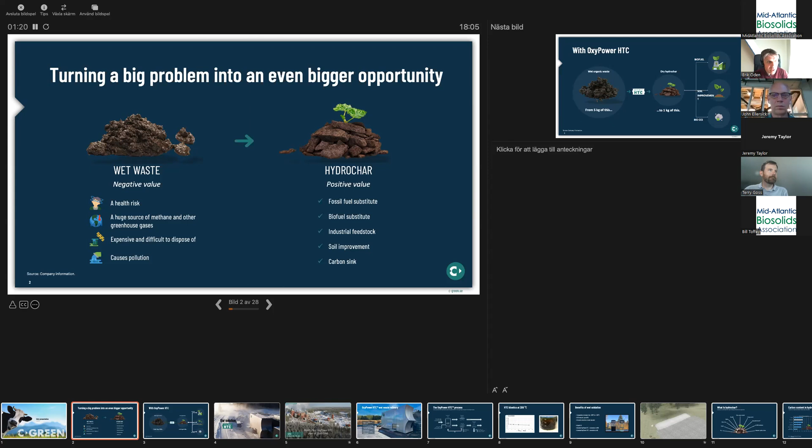What we've done is taken proven technology from the forest industry that's been used for hundreds of years and turned it into a solution that we call OxyPower HTC that turns the wet waste streams into a dry hydrochar. So what we in our process can do is reduce the volume. For every 5 tons of waste, we turn it into 1 ton, or 20% of the original volume, of hydrochar. That can be used for several different useful applications. I'm going to show you the first one here very soon.

So this is our first full-scale plant. When we started in 2014, we developed the technology at the Royal Institute of Technology at the lab we had there, and did hundreds of trials for different kinds of sludges, and showed that this works on all kinds of biosolids, digested, undigested, and all kinds of different wet waste streams. We built a pilot plant with a capacity of 1 ton a day.

And then we found out that Stora Enso were interested to help us build a full-scale plant. And this is the world's first OxyPower HTC plant that converts about 20,000 tons of wet biosludge into hydrochar. And here's a small film showing it in operation.

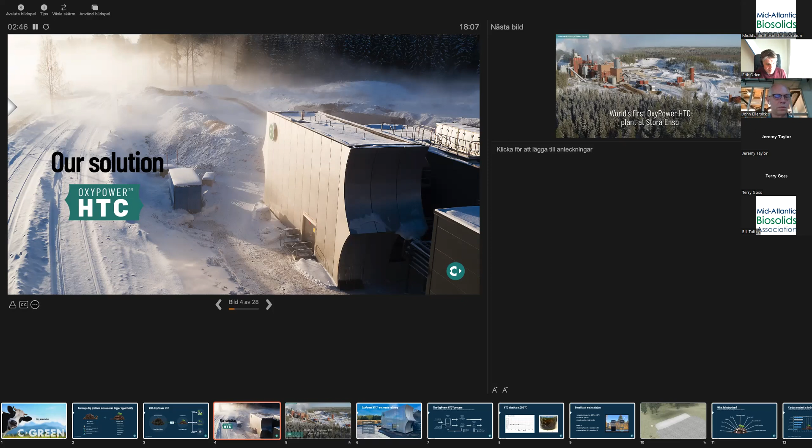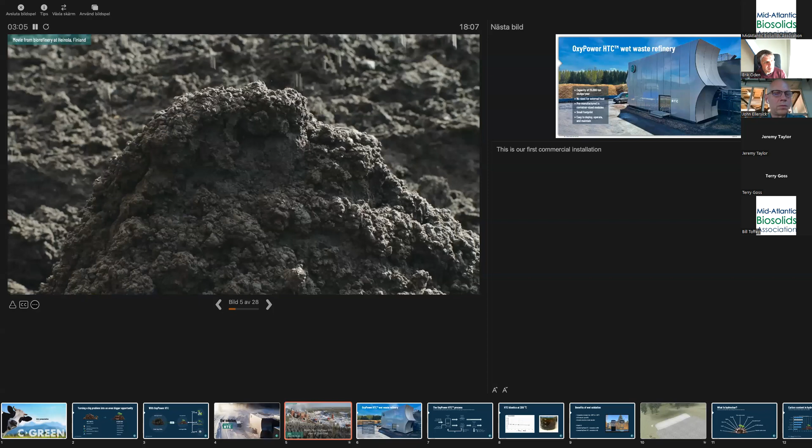I'm here at Stora Enso's mill in Heinola, Finland. C-Green worked together with Stora Enso to build the world's first OxyPower HTC plant using our unique technology to convert wet sludge into solid biofuel. The plant is now operational, and each year it will turn 18,000 tons of sludge into biofuel.

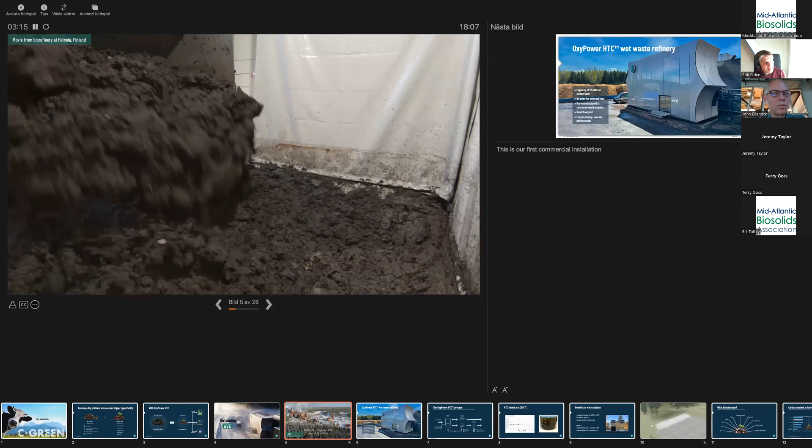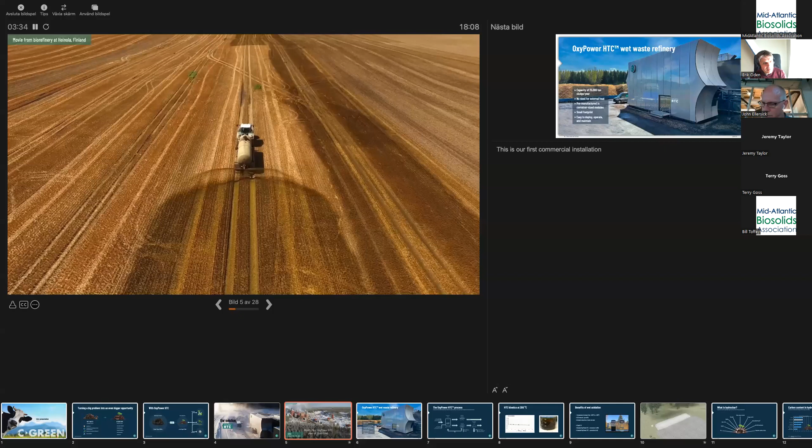The impact of sludge handling is not so well known, but it is a major climate and environmental problem. Sludge from the treatment of wastewater from industries, households, and food production causes greenhouse gas emissions, can spread dangerous substances in the environment, and can pose health risks. With our new technology, we can lift sludge handling into the modern circular bioeconomy and harvest useful resources from what have been, until now, seen as waste. In this plant, the sludge is turned into a carbonized biofuel using oxygen from the air to power the process.

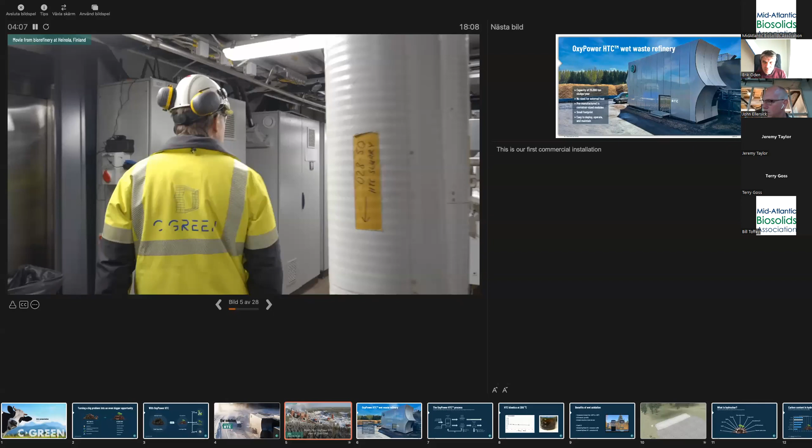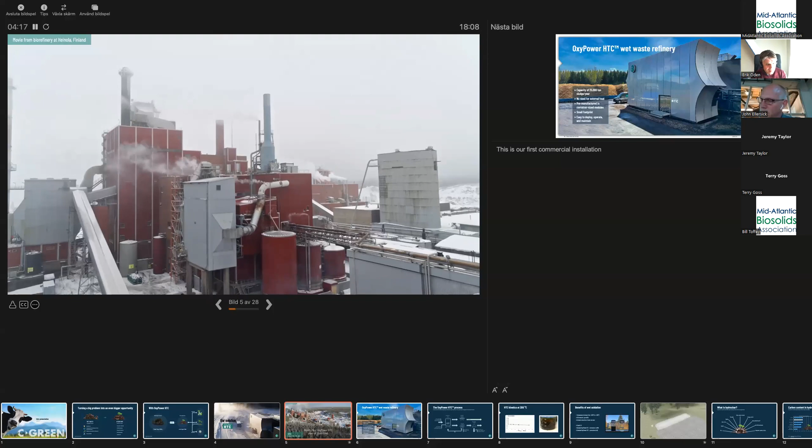Here at Stora Enso's mill, the biofuel is incinerated in the boiler, which means they need less external fuel. The boiler produces energy for the mill and for heating the town of Heinola. The biofuel is safer and easier to handle than sludge, with a volume of less than 20% of the sludge.

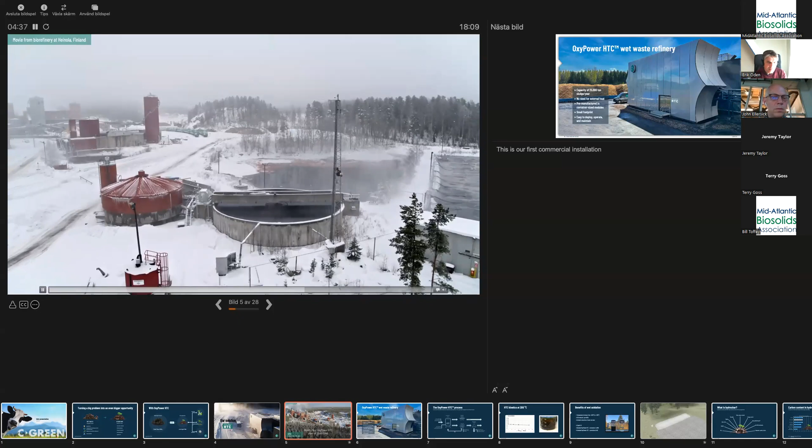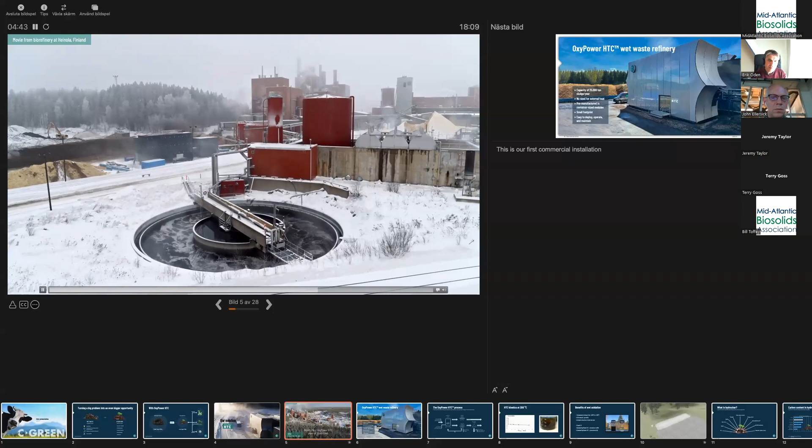Here in Heinola, the water removed from the sludge is used to increase the mill's biogas production and to help reduce the need of chemicals for the biological water treatment. C-Green's sludge handling technology effectively stops greenhouse gas emissions from sludge storage. The biofuel produced can replace fossil fuels. In future plants, it will be possible to separate nitrogen from the process and replace fossil fuel-based fertilizers.

This first commercial OxyPower HTC plant is just the beginning. Here, sludge is no longer a waste problem and a climate threat, but the source of useful bio-based products. This is the solution to the global sludge challenge.

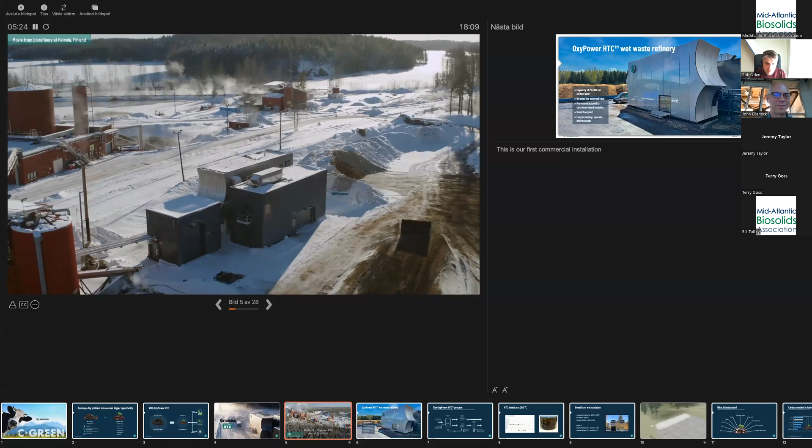Right. So our approach when it comes to designing plants is both to try to make them beautiful and also to make one that is, like the Model T, one size fits all. So we've created a plant design with a capacity of 25,000 tons of wet sludge per year, with the capacity to handle 5,000 tons of dry solids.

The technology as such, I will come into how it works a little bit. It doesn't require any external heat. And it's built up from prefabricated modules. I will also show how they are built up together. And all in all, it is a very small footprint of a refinery that can handle all this sludge and turn it into something useful.

So typically, you can handle all the wet waste from a city of 200,000 to 300,000 people. And it's fully automated. The plant in Finland will run from Stockholm without any problem, without anybody there for the actual operations.

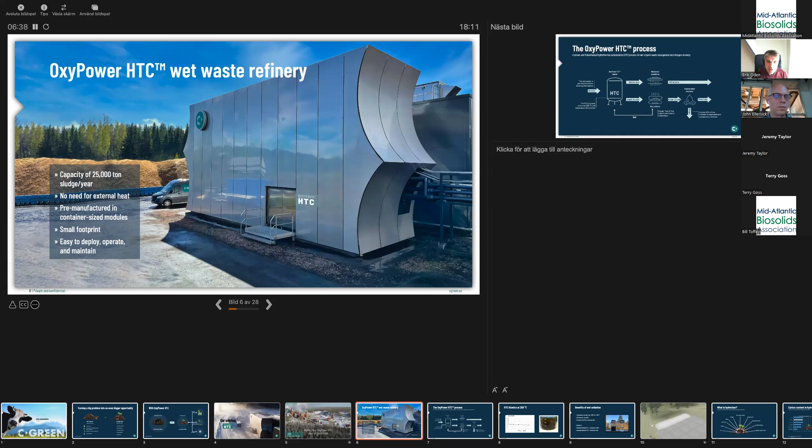So the basic principle is that we feed in the biosolids into the process and heat it up, and it comes into the HTC reactor. I will go through it a little bit more in the film, more animated. In the reactor, we get two streams out, a slurry rich stream that we dewater and it turns into the hydrochar, and a stream that doesn't have virtually any particles, and that we oxidize with oxygen from the air to create the heat we need to power the process.

Most of the nitrogen will end up in the water, and we have the possibility to extract that in the form of ammonia as well. A nice effect of wet oxidation is that the nitrogen that comes in many forms is turned into ammonia, which is quite handy.

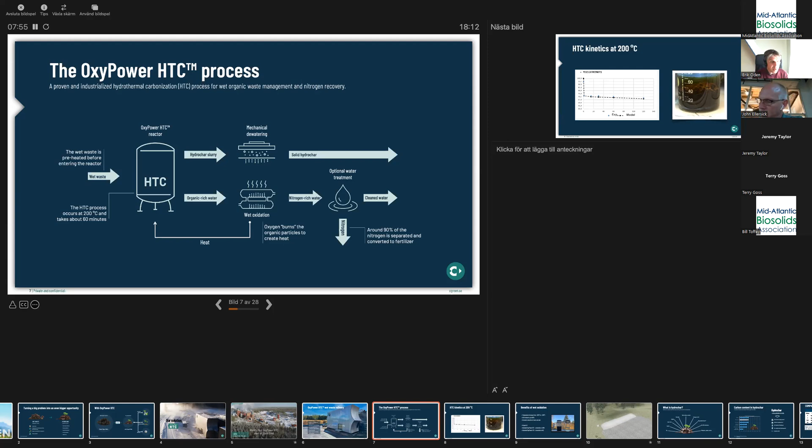So what happens when you heat up the waste? Very, very quickly, at around 200 degrees, it turns into these carbonized particles that are hydrophobic. So the actual carbonization goes very, very quick. But the particles are very small, and to be able to dewater them effectively, we need to have a retention time. Typically, we use about 1 hour to have an efficient dewatering.

And what's quite interesting and fascinating, if you worked a lot with biosolids, that are very, very difficult to dewater, is that the particle-rich stream separates very, very easily and nicely if you take it out from the reactor, and you can see that in the film here.

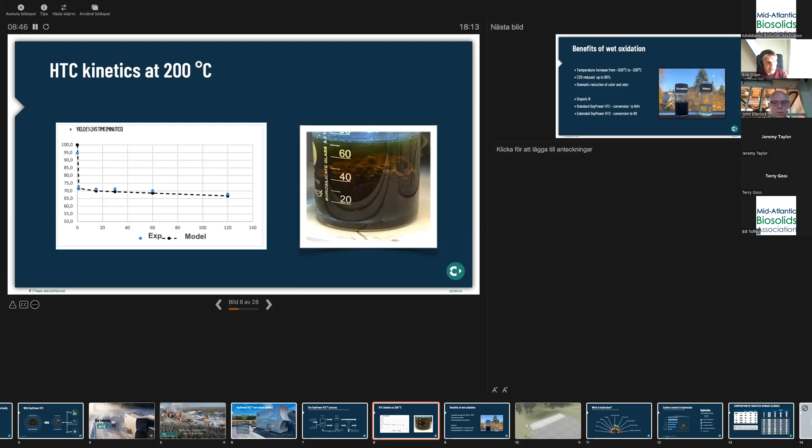The water that we take out, the particle lean water, I have it here as well, looks like coffee, and about 30% of the organic material will end up dissolved here. So it's a lot of COD, BOD in this one. And of course, that's a good energy carrier.

So we thought, how could we make use of that and clean it at the same time? And also, how could we find a way to power the whole process? Because we constantly need to heat up the incoming stream of biosolids or waste. And we came up with the idea to use wet oxidation.

And when we add oxygen at 200 degrees, you get the wet incineration and you remove the COD. And the more oxygen you add, the more you remove. So actually, if you use catalytic wet oxidation, then you can remove all the COD. So you can see it's a huge difference.

So here we have a gas pedal to use to clean the return water, and also to produce the amount of heat needed, and also extra heat if that is of interest. And you at the same time have the nice effect that the nitrogen is converted to ammonia.

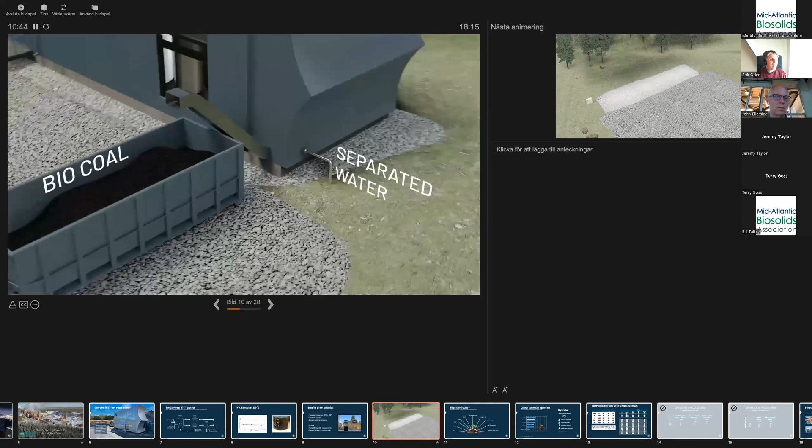So our plants are modular and designed to be built in large scale. So here you can see the modules, how easy it is to transport them to site, put them together, and build a plant. In you have water and sludge and electricity, and out you get the hydrochar and the return water. In this process, we feed in the sludge and heat it up with steam in steps, so there are no indirect heat exchangers.

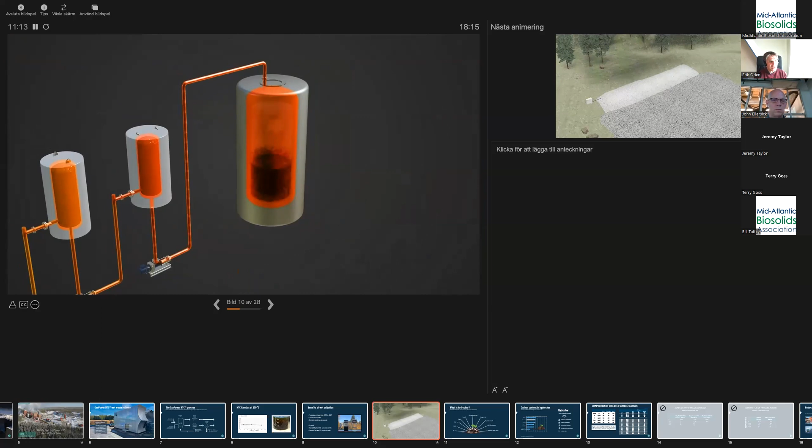And so with higher and higher pressure, at the end it's about 200 degrees, and it goes over to the reactor where we have a guaranteed retention time. In the bottom of the reactor we have a particle-rich stream, and in the top we get the particle-lean. The particle-lean we take into a separate reactor where we add the oxygen, and then you get this wet oxidation, you increase the heat.

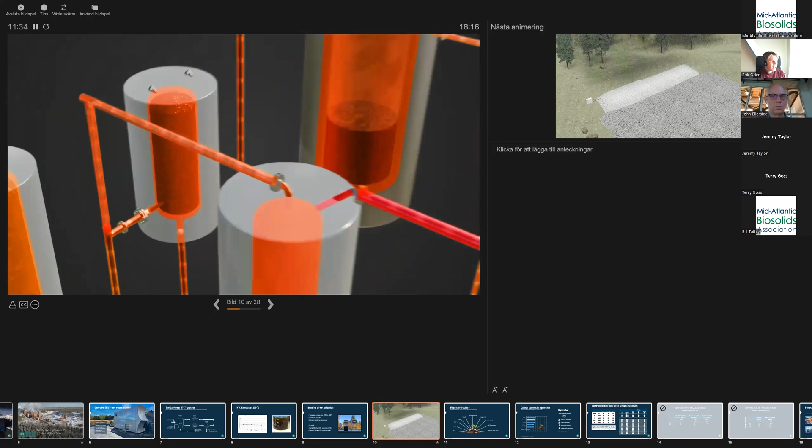And then we have very hot water that we can use to produce steam by reducing the pressure. Then we get the steam for the incoming sludge to heat it up. That's by reducing the pressure in a step called flashing. We produce steam with different pressures and different temperatures to heat up the incoming. And the same we do with the slurry fraction.

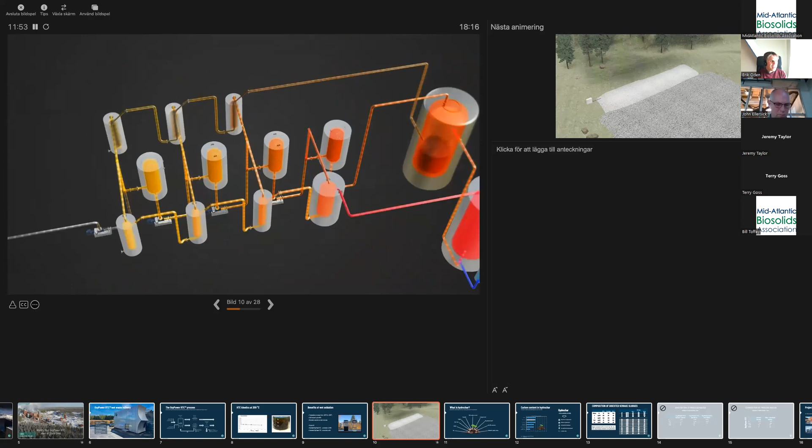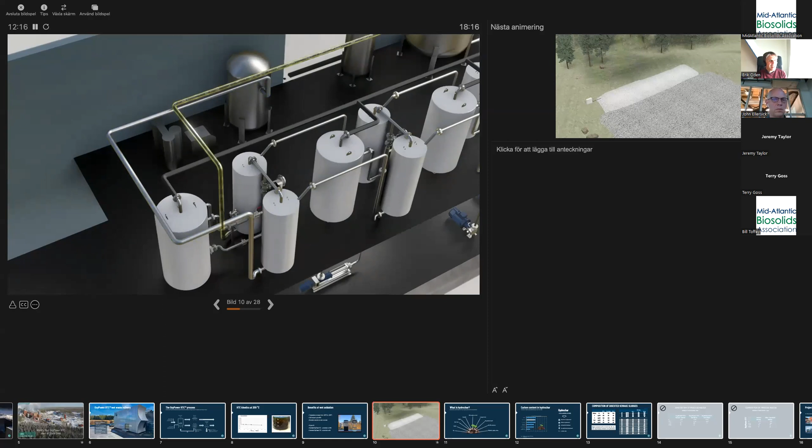And that slurry fraction, after we recover the heat, we use it to produce biocoal, and the other one, the particle-lean one, is sent back for water treatment, for example to a wastewater treatment plant. As a final step, we dewater the slurry, and we use a filter press for that. And out you get the dewatered hydrochar. So this is a very short version of how our process works and how the plants are designed.

So by having this modular approach, we could set up an assembly line and easily produce these different container-sized modules that are uniquely configured, and thus be very efficient in producing several of these. We could set up first an assembly line in Europe and then build one in North America, which is our plan.

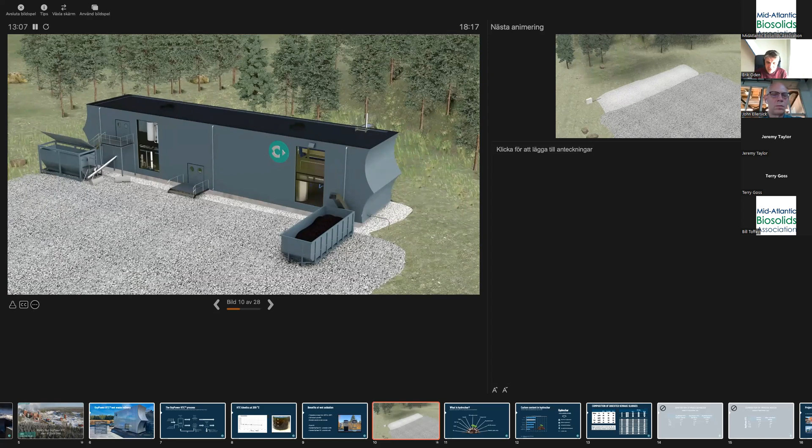All right, so some of the properties of hydrochar. I guess all of us are going to talk about that, but it's a very interesting product. It's very peat-like, if you haven't seen hydrochar. Due to the temperature of the process, it's sterile, and the smell is very similar and independent of what feedstock you use, which is quite nice. And depending on how much carbon and organic matter you have in the incoming feedstock, you will have more or less energy in the hydrochar.

It's quite inert, and it's easy to pelletize. And when you pelletize it, it's very, very stable. I have some pellets here that were pelletized several years ago, and you can put them in water and nothing happens, since they are hydrophobic.

We've done trials on all kinds of different feedstocks, and depending on what you put in, you will get something similar out the other end. So the more carbon you have in the feedstock, the more carbon you will have in the hydrochar, and that will be the same for all kinds of components. Here's an example: manure, which is quite carbon rich, or the pulp biosludge. Digested sewage sludge works fine, but you will have a hydrochar with a lot less carbon than undigested, for example. And that will impact the different possible uses of the hydrochar.

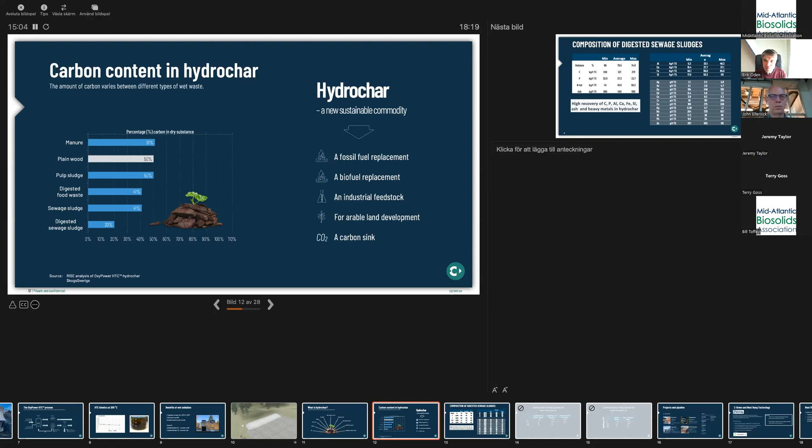So where do different components end up? Most of the metals will end up in the hydrochar, especially the heavy metals. So we have a high recovery of those in there, if you're interested in that. And the phosphorus, which I think is very simple, ends up in the hydrochar.

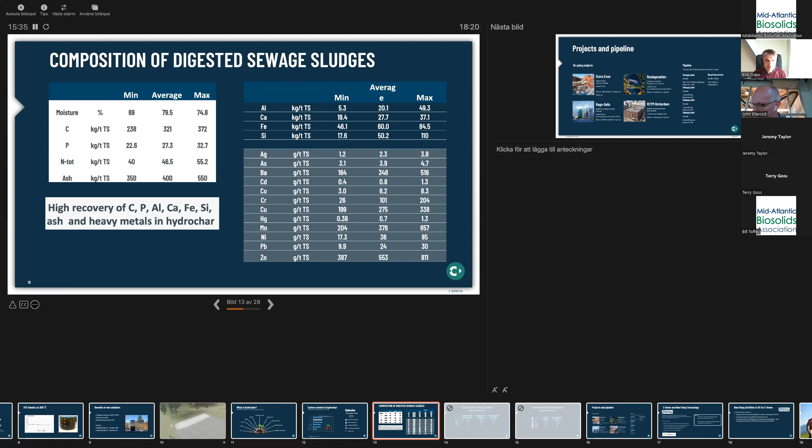Today we are not only working with the first full-scale plant in Finland, we are building several more in Europe. In the Stockholm region, we're building what we call the world's first biosolids-free wastewater treatment plant, where we will integrate our OxyPower HTC plant with their treatment works. So the in-feed will be sewage, and out we will only get hydrochar and clean water.

And together with Ragn-Sells, which is a waste handler, the biggest in Sweden, we are building a plant at one of their waste recycling facilities. We're actually building one more with another waste handler in central Sweden that is focused on cleaner streams. Their focus is not biosolids, it's forest residue and biosludge, and their aim is to make a peat, biopeat. So that's an additional one.

Remondis is one of the largest, if not the largest, private waste handling company, with 30,000 employees. They have operations in the Netherlands through the company Rime, which they own 100%. With them, we have started a project to build a plant for industrial sludges, which I think is very, very interesting.

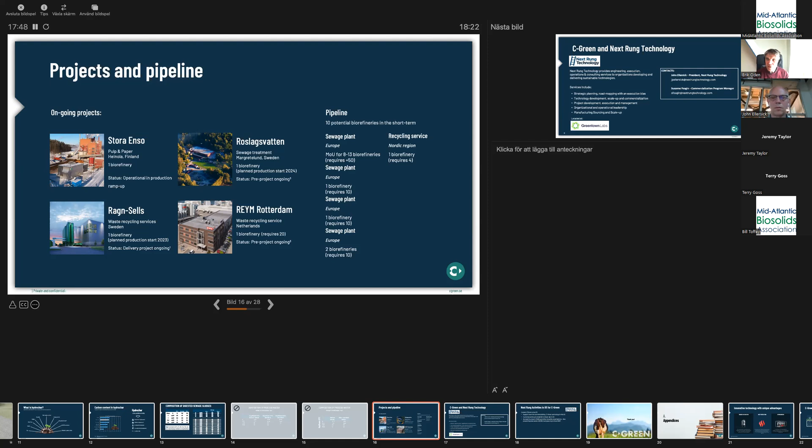We have a very interesting pipeline, and I cannot name these companies, but they've signed MOUs with the intention to build plants if everything follows plans and they get the permits, and the pre-studies result the way we anticipate. So we have a very interesting pipeline of plants to build in Europe. And now we want to take this technology together with Next Rung to the US. So John, I'll leave the word to you.

I'm John Ellersick with Next Rung Technology. We've collaborated with C-Green for over two years now, looking at the opportunities in the United States, which are strong and many, and how this technology fits the US market. There's plenty of differences between the US market and the EU, and also some things that are similar.

I'll highlight a few things we think about, like the reduction in sludge volumes by themselves, which is very meaningful, especially in an environment where it's difficult to truck or transport solids. Everybody here is familiar with challenges around landfill costs coming up, landfills even closing to municipal biosolids, changing regulations and tolerance for land application, and issues around the emergence of PFAS throughout the country.

In the United States, sustainability is just becoming a forefront issue for municipalities, whereas in Europe it's been strong for a while, and people are realizing that how you manage your biosolids is a large part of achieving your low carbon or net zero solutions.

To go to the next slide, Eric, we've been actively conducting outreach in the US for the last year and a half, collaborating with all the different parties in the ecosystem, whether it's municipalities, consulting companies, engineering companies, or solids aggregators. We've got a team located at Greentown Labs, America's largest clean tech incubator, in Somerville, Mass, and also in Houston, Texas.

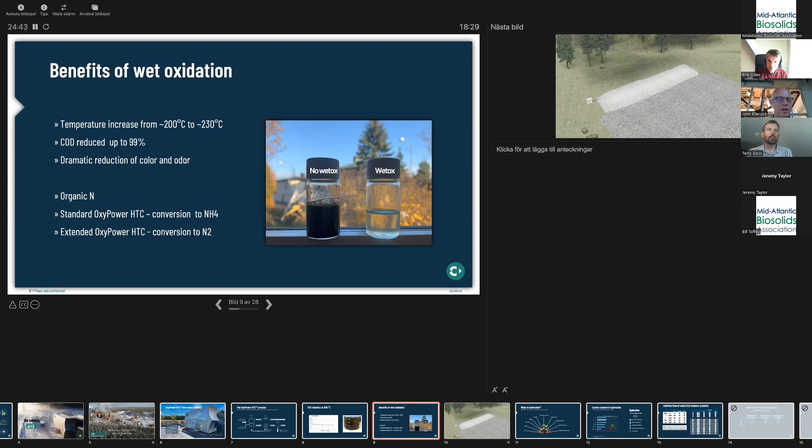Samantha McBride asked about contact for samples, regarding New York DEP. If you go to the last page of the slides, we'll make sure this is available. If you reach out to us, Samantha, Suzanne, who is also on this conference, and myself are the US contacts, and we can set up receipt of any sample materials.

One last question, then we'll move on to the next speaker. With the wet oxidation process and getting energy out, how does that energy balance work? Is there excess heat that still needs to be wasted, or how does that work?

We add the amount of oxygen from the air that's needed to power the process. Initially we need to kick it to start it up, so we need some kind of heater. We use an electrical heater, but one could use other kinds as well, to heat up the system to around 200 degrees. Then it works by itself.

What pressure is that tank at? We're typically running at around 20 bars in the HTC process. For the wet oxidation, I think we add oxygen at a little bit more than 30 bars.

There's some opportunity to tune it per application. If for some reason you had a use for that heat, you might do further wet air oxidation than in the case where you're simply trying to have a closed heat loop. We have customers with biogas plants nearby that need heat to keep them hot enough for good speed in biogas production, and they need heat for that.

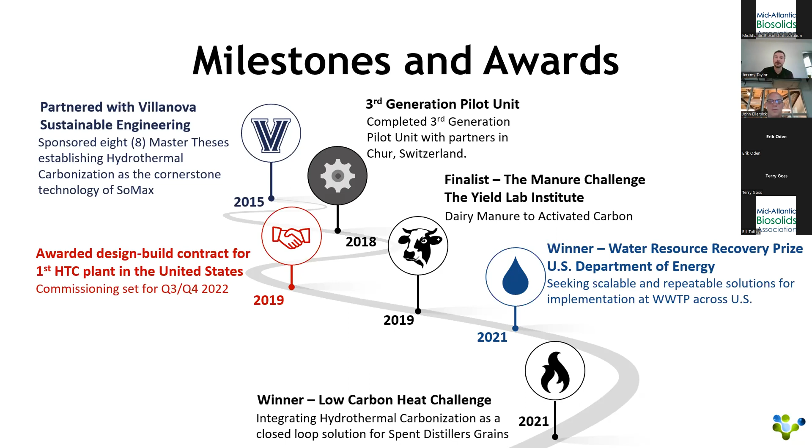SOMAX approaches our customers with our resource recovery platform, with HTC as the cornerstone technology and a number of other technologies provided by other technology providers, to close the loop on water recirculation for carbon neutral energy generation and returning nutrients to our soils.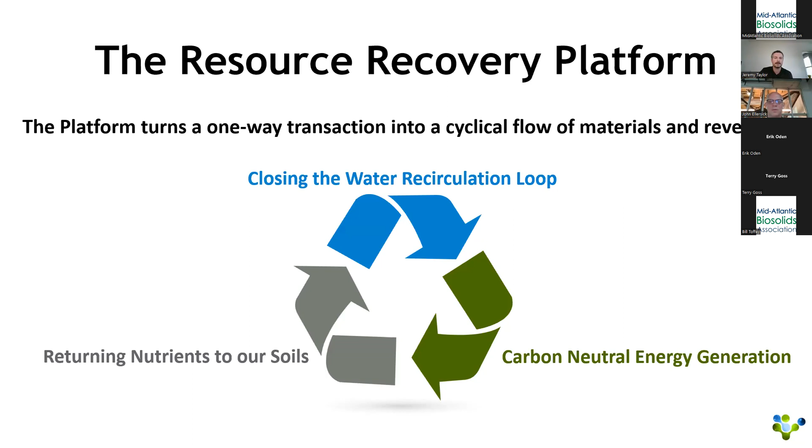The platform acts as, in turns, a one-way transaction into a cyclical flow of materials and revenues. Again, HTC is our cornerstone technology, and we partner with a number of different technology providers to provide these solutions to our customers. Before getting into HTC, I want to talk about the current organic waste solutions and compare some core metrics of HTC versus the status quo.

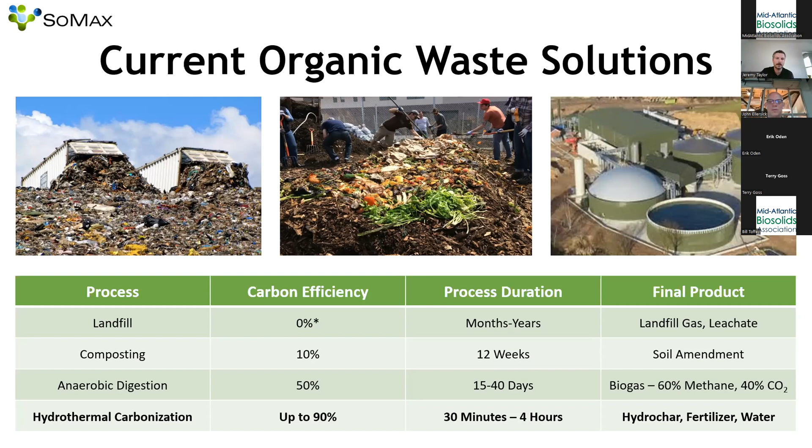This containerized solution allows us to be quickly deployable, highly modular, and easily scalable. We've decoupled the heating phase from the reaction phase in this system, and it allows us to scale down quite nicely. At this lower end of our system, we can do 2,000 tons per year. While it doesn't scale economically, it is doable.

At Phoenixville, we're doing about 15,000 tons per year at roughly 15% solids. I would like to bump that up to 20% solids as we get it commissioned and up and running, but currently targeting 15% solids. So let's get into some science.

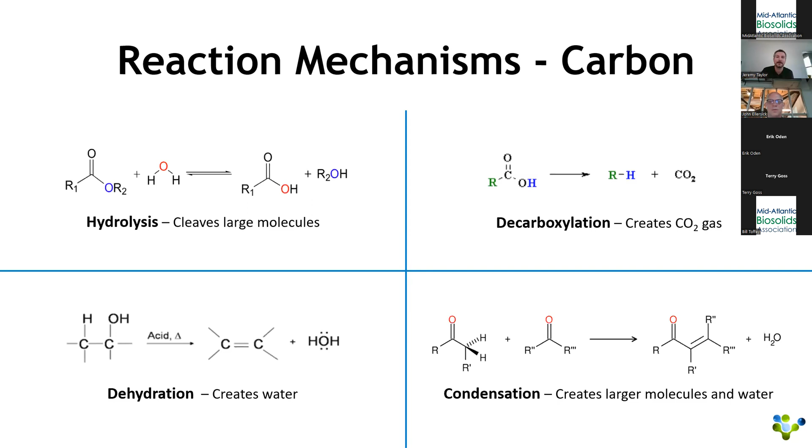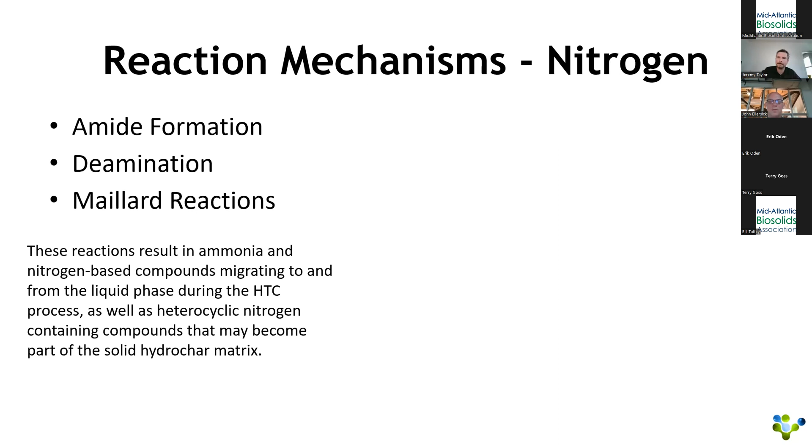Going a little bit deeper in the science, one of the products of Maillard reactions is hydroxymethylfurfural. This is hypothesized to be one of the core compounds to make secondary char. So primary char is the solid matrix that is being transformed into a more carbon-dense material without materials going into solution. Secondary char is those compounds that have been released into the solution, recondensing and polymerizing into a secondary char.

So primary char is just the changing of the solid matrix. The secondary char is the recondensation of those released molecules in solution back to the solid matrix. And that's what really sets HTC apart from some of the lower end thermal processing.

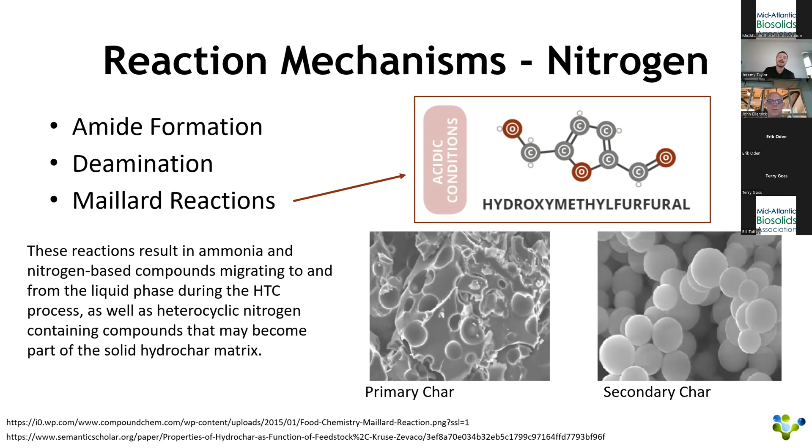One thing to mention too is Maillard reactions is something that you all have done, whether you know it or not. It's the reaction that takes place whenever you're cooking a steak and it browns and you get that good caramely burnt roasted flavor mixed into your steak, or if you're roasting grains before brewing, that is a Maillard reaction. So pointing out those reactions and speaking to them is quite easy, but whenever you see the compound soup that is associated with food waste or with sewage sludge, the exact compounds that get generated are pretty tough to track.

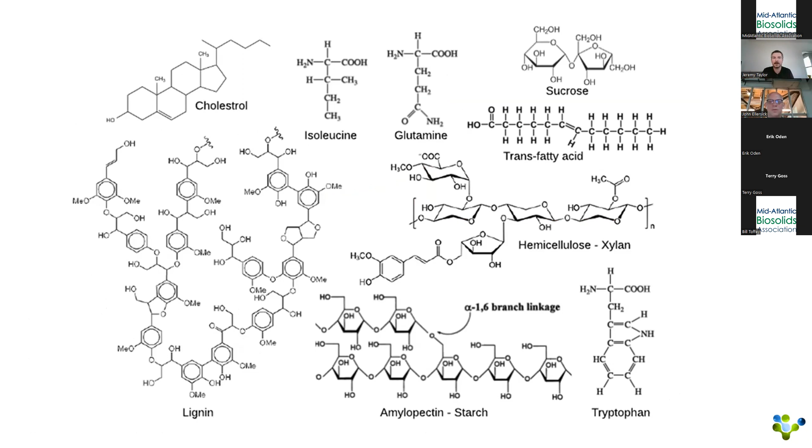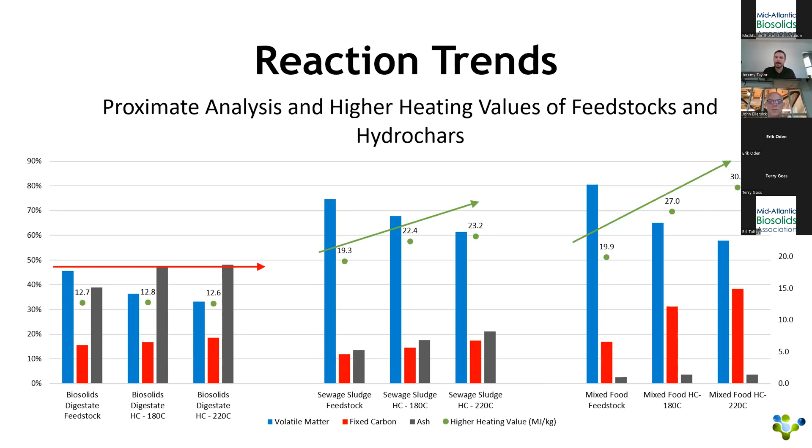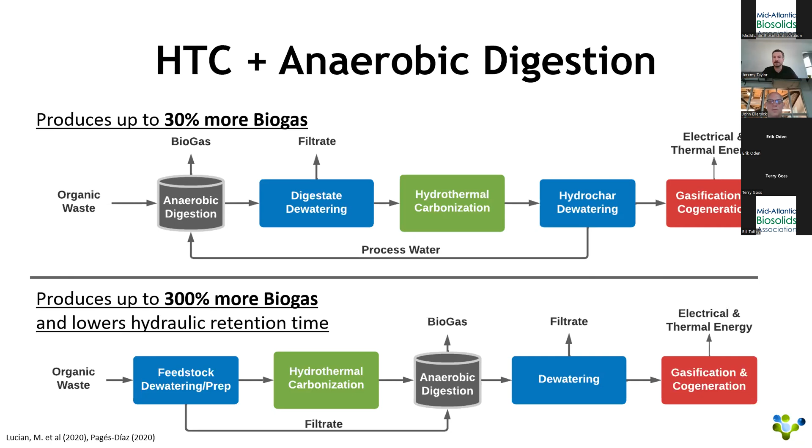So a question that was asked previously is what happens with PFAS? It's still not fully known where the PFAS goes to in the liquid stream, or what they get converted to, if they do at all. This study was done out of Germany in 2016, taking sewage sludge, converting it at 210 Celsius for 4 hours.

The sum of the PFAS in the sewage sludge was 104 micrograms per kilogram. And the sum of all PFAS in the hydrochar was 32 micrograms per kilogram after HTC. So it's a 2/3 reduction in total PFAS. And that number is important because in Germany, it meets the threshold for land application. So the sewage sludge by itself did not meet the land application criteria, where after HTC it did. We also saw a complete removal of PFOA.

So I want to put it out there, if there are PFAS testing companies that are comfortable testing solid matrices, get at me, let's do some PFAS testing. We have samples lined up and are looking to go in depth on this and track PFAS throughout the HTC process. So that's it for the science on this.

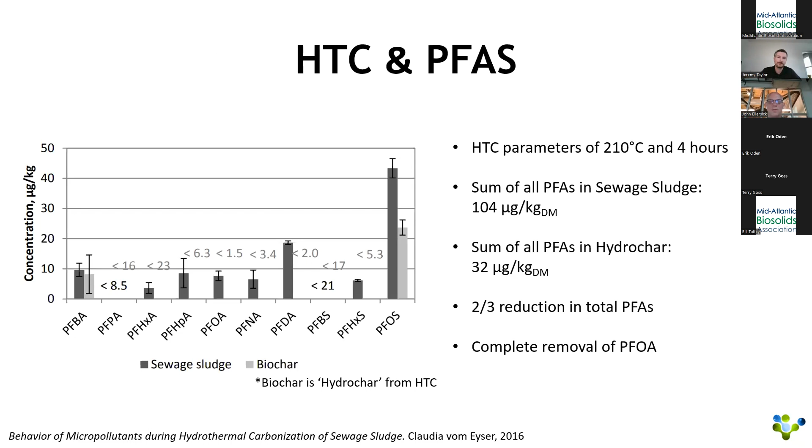And we can start talking about the Phoenixville facility. So the Borough of Phoenixville branded the HTC facility as the PXV NEO, the Phoenixville New Energy Optimization Hydrothermal Carbonization Facility. They're really leaning into this. They're going to get a big mural painted on the facility. It's awesome. If you want to track the construction of this, check out the website at pxvneo.com.

So the borough of Phoenixville is a small town. There's a population of about 17,000, but they're very progressive. They're the first municipality in Pennsylvania to pledge to 100% clean, renewable energy by 2035. They did an energy audit and found that their wastewater treatment plant was the largest energy consumer, and they wanted to see what they can do to take it offline.

This is when we met with Phoenixville and told them about HTC and its capabilities of being an energy producer for their municipality. After the feasibility study, we found that we could produce more energy than their wastewater treatment plant consumes. And they were sold on implementing HTC and eventually gasification of the hydrochar.

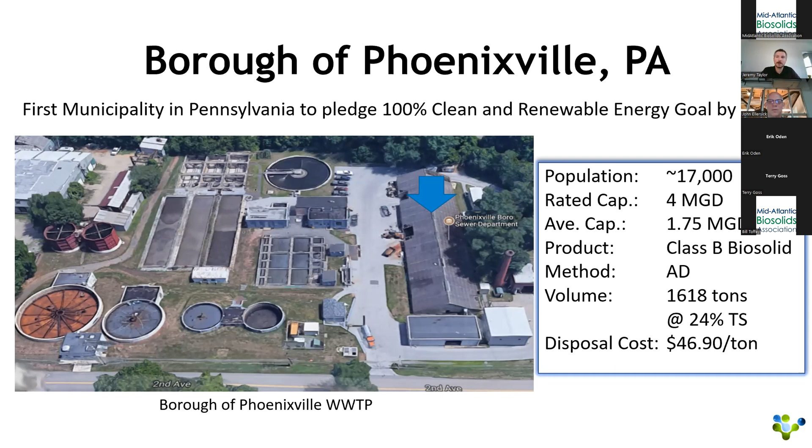So our current project timeline with Phoenixville, we started in 2019 with the engineering design. Currently, we are under construction and we're waiting on one final piece of equipment to arrive. That's our inlet pump. Once that is in place, we'll be laying pipe and in construction in earnest. In Q3, we're hoping to commission the HTC facility. With current supply chain issues, I'm sure there's going to be some oddball thing that keeps us from doing that. And my pessimistic view is we'll be doing it in Q4.

For those engineers that are on the call today, if you have gone through the past 2 years without any delays on your projects, congrats, because COVID and supply chain issues have been a headache.

In 2023, we're going to increase feedstock procurement, so open up the facility to bring in hauled waste, and we're going to be proving and permitting the beneficial use cases of the hydrochar. With that, we will be applying for a Pennsylvania general permit or an individual permit at the treatment plant. And around 2024-25, we'll look to implement phase 2, which combines food waste feedstock into the HTC process and includes gasification and cogen for carbon neutral electricity generation.

Here's the wastewater treatment plant process flow diagram. I'm sure you all have seen many of these, and there's nothing too special about it, but I want to point out where we tack on to at wastewater treatment plants. Right at the point of dewatering and prepping your solids is where HTC gets tacked on.

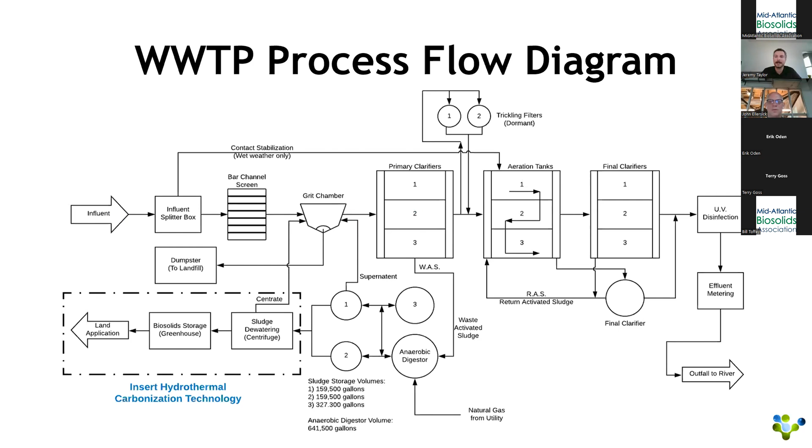So in this case, we will be taking over their centrifuge and using that to feed the feedstock into our system and using the biosolids storage greenhouse and putting our HTC equipment there. We'll be doing away with land application of their sludge. So again, we have that integration point at the treatment plant, and then we get into our HTC process.

So we take the centrifuge sludge that's about 15% solids, get it into a live bottom storage hopper, which feeds the piston pump. And the piston pump is a workhorse for our process. It moves the sludge through the entire process to the depressurizing pump. The cold substrate enters a double pipe heat exchanger, which has a water loop in it. And that gets the material up to about 160 Celsius.

From there, it goes to our specialized jacketed heaters, where they're jacketed with a thermal oil. That thermal oil heater can be electric. The one in Phoenixville is natural gas fired, and it consumes about 1.33 MMBTUs per hour of natural gas when processing 15,000 tons per year.

When the heated substrate leaves the heaters, we're at about 205 Celsius going into the reactor. We lose a few degrees throughout the reactor, and then that product slurry goes through the double pipe heat exchanger, heating the cold substrate. From there, it passes through a depressurization pump and into a buffer tank where it is held to be dewatered.

You'll note that there is some odor control on this. This was to really work through the air permitting guidelines from DEP, and we were able to not have a defined air permit on this process initially when applying these activated carbon drum scrubbers. The emissions associated with HTC are not nearly as pungent or smelly as the raw sludge that will be in the live bottom storage hopper. But it's an unknown to PADEP, and they wanted there to be odor control.

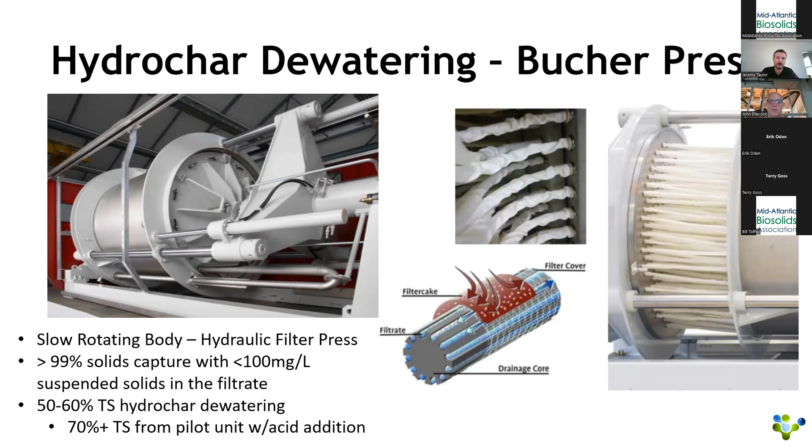So this is what our equipment layout looks like in Phoenixville. On the right side here, we're looking at about 60 feet wide, and up to this garage door, which I pointed out previously, is about 115 feet. We just talked through the process flow diagram, but I will do it one more time real quick so you can see what these components are.

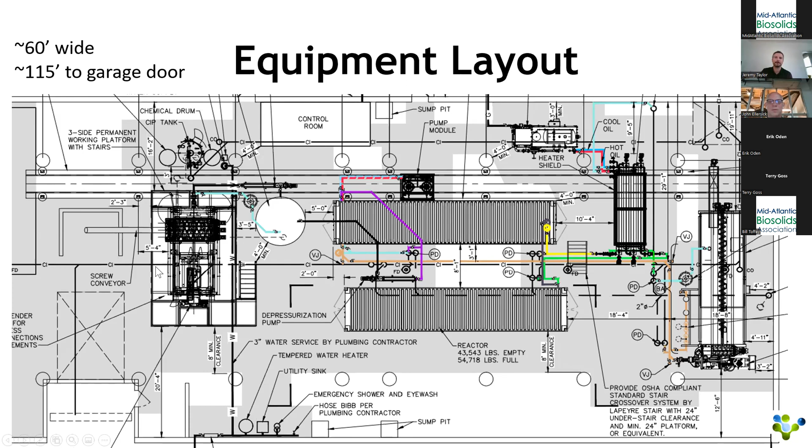This is the live bottom hopper. It feeds the piston pump, which goes into this dark orange line, feeding our heat exchanger. The heat exchanger feeds the heaters. Heaters are heated by a thermal oil natural gas fired heater here. From the heaters, it goes into the reactor to heat exchanger to depressurization pump to buffer tank, and then dewatering from there. So here's some construction pictures.

This is what the greenhouse looked like before we started. You can see it was mainly just used for biosolids storage. A logistics company would come and pick it up every couple months and go and land apply the material.

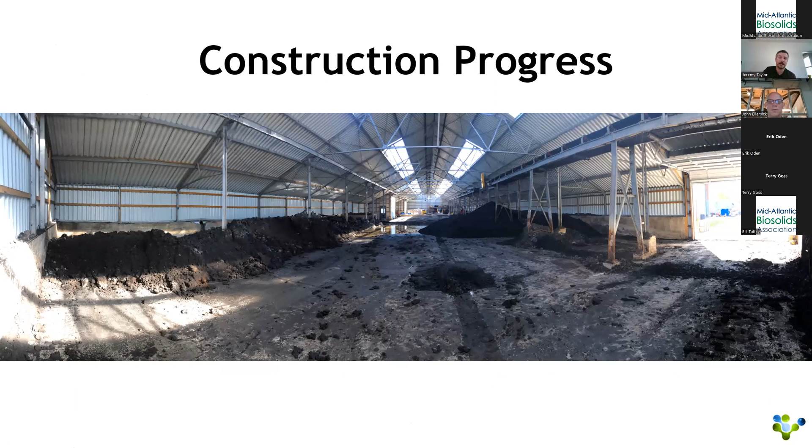To hold the weight of the equipment, we needed reinforced concrete, and we wanted to put in some integrated piping as well for plumbing and drainage. So we did one side at a time. And if you can see in this picture, we still have biosolids being dropped on this far end here. So the production of biosolids and the wastewater treatment process was not interrupted during this construction.

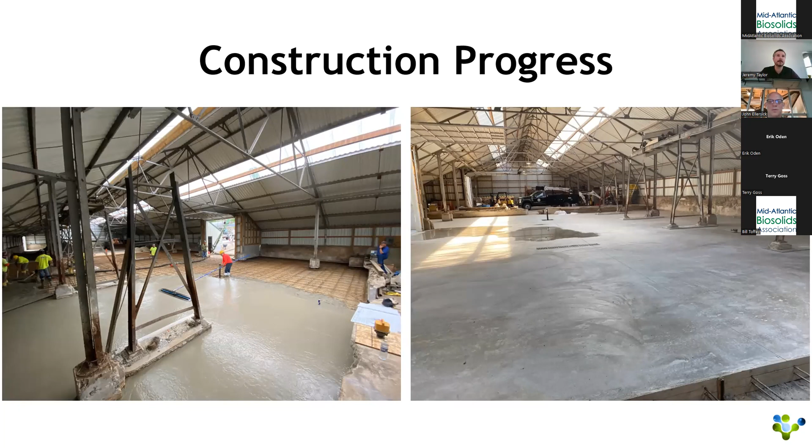Here's what it looked like prior to setting equipment. This will probably be the cleanest the floor has ever been inside the greenhouse. Here is a picture of the live bottom hopper. This thing is a tank. It holds about 1 day's capacity, which is around 10 to 11,000 gallons of sludge. It's not fully constructed here. There's no catwalk up top or guardrails. It's just getting it placed.

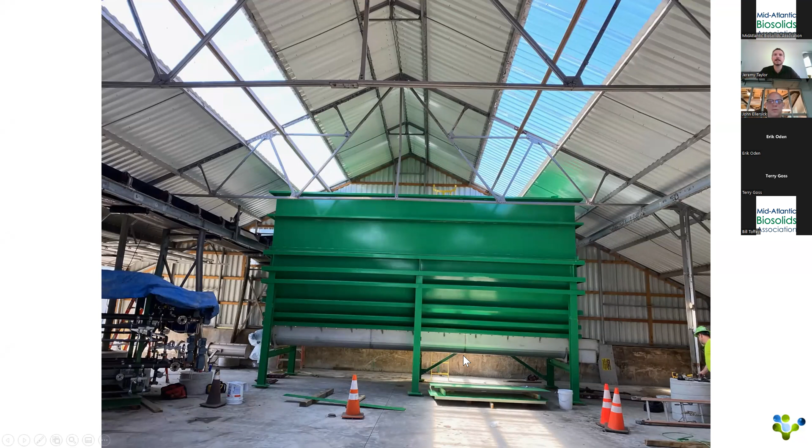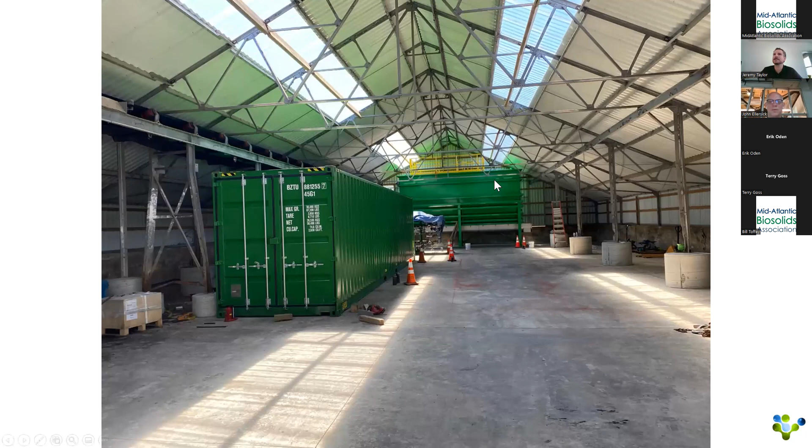Here's a photo of loading the heat exchanger or reactor into the greenhouse. If we were to do this again from a clean plot, we would put the equipment into the building before putting the roof on. It would make construction a bit quicker and less stressful. Here is a picture of the heat exchanger being placed and the guardrails up on the hopper. Here you can see our heater skid is in place as well.

And here's a picture of the reactor getting set inside the greenhouse. So we'll have our buffer tank here, and then the Bucher press sits about where those drainage cores are, or the drain is.

Oh, I'm coming up on time. So a couple more slides left.

Here's some hydrochar utilization potential, and I'll highlight the use cases that we're pursuing at Phoenixville. So in this blue bubble, we will be pursuing using hydrochar as a solid fuel, getting it permitted as a solid fuel in the state of Pennsylvania. And at phase 2, we will be looking to gasify this material as well. Biogas is not necessarily going to be used at Phoenixville, but as Erik had pointed out previously, it can be integrated with HTC. We'll not be touching the renewable energy storage potential uses with the sewage sludge hydrochar. This takes much cleaner feedstocks to even consider making those materials.

In agriculture, one of the cases we're going to try to get permitted is as a land applied Class A biosolid. It's not what we want to be doing, but as steps to progressing to these beneficial uses, it's going to have to be applied for. Also, we're going to be looking at extracting fertilizers from the processed water. We're working with the chemical engineering department at Villanova this coming school year to do some studies there.

We have a PhD research study underway currently looking at water and gas purification from hydrochar. This looks at not only the hydrochar, but pyrolyzed hydrochar and then activated hydrochar for heavy metal absorption and for the potential for stormwater runoff.

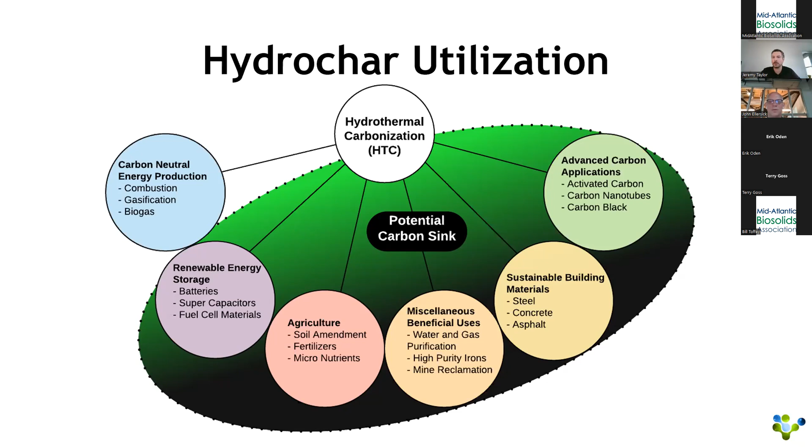So our approach to permitting in Pennsylvania: we're currently permitted as a captive municipal waste processing facility under a permit by rule. But under a permit by rule, the hydrochar is still considered a waste and must be stored on site until approved for whatever beneficial use we're going to be using it for. There is an exception though. We're able to send it out for beneficial use testing, and that's when we'll really tap into our partner market and get some of these potential use testing underway.

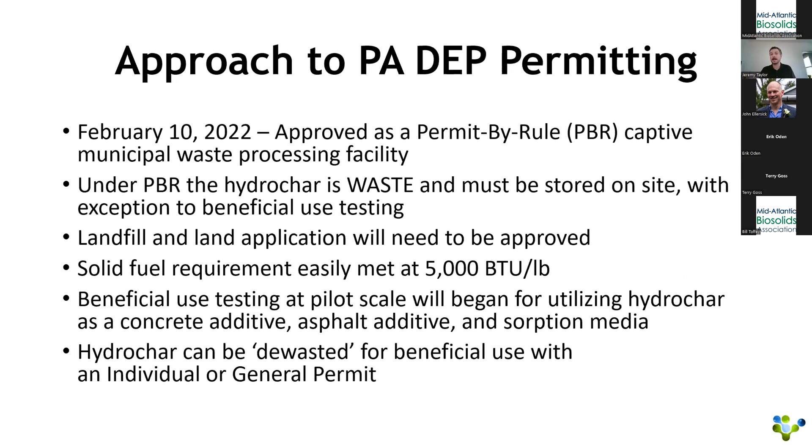So like I said, we need to get it approved for landfill, land application. It meets the solid fuel requirement easily, which is 5,000 BTUs per pound. And we'll start the beneficial use testing at pilot scale with our partners. The hydrochar can be de-wasted for beneficial use with an individual or general permit. And that allows us to sell this into the market and treat it as an actual material and commodity and not as a waste material.

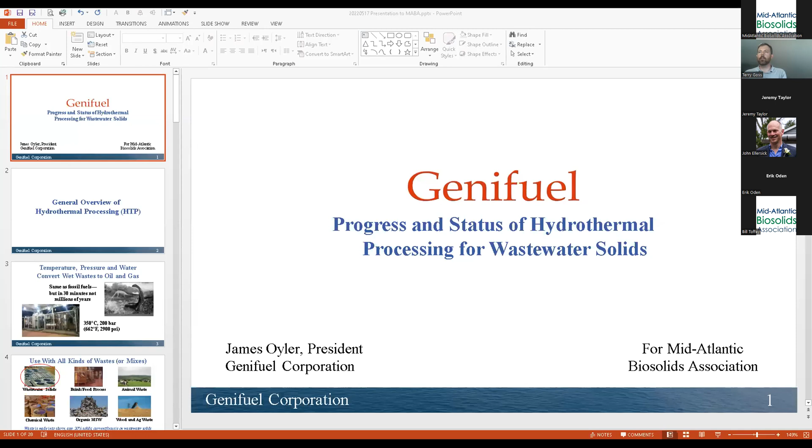Okay. So move on to the third and final presentation today by Jim Oyler at Genifuel Corporation, and he'll be talking about progress and status of hydrothermal processing for wastewater solids. Mr. Oyler is the founder and president of Genifuel Corporation, formed in 2006. Genifuel provides hydrothermal processing systems which eliminate wet waste, especially wastewater solids, by converting them into renewable fuels. Genifuel has recently commissioned a pilot scale hydrothermal processing facility and is currently in the engineering phase for several wastewater utilities in North America and Europe.

Mr. Oyler holds more than 20 patents issued or pending, as well as exclusive licenses to other patents for hydrothermal processing. Earlier, he held senior positions in energy consulting and corporate management, leading to 12 years as CEO of a publicly traded company. Jim, the floor is yours.

Okay, thank you, and good morning or good afternoon, everybody. So we'll be talking about hydrothermal processing, but we're switching gears a little bit here. Instead of oxidation or char formation, we're producing a hydrocarbon, either the simplest hydrocarbon, methane, or longer chain hydrocarbons, which are liquid oil, both fuels.

So with that, let me give you first a general overview of this form of hydrothermal processing, or HTP. What we're doing here is we're using temperature, pressure, and water to convert wet waste materials, organic materials, into oil and gas. It's the same process that formed fossil fuels, where organic matter settled into swamps or shallow lakes, builds up over millions of years, produces temperature and pressure, and accomplishes the transformation. We're doing the same thing, but we do it in about 30 minutes instead of millions of years.

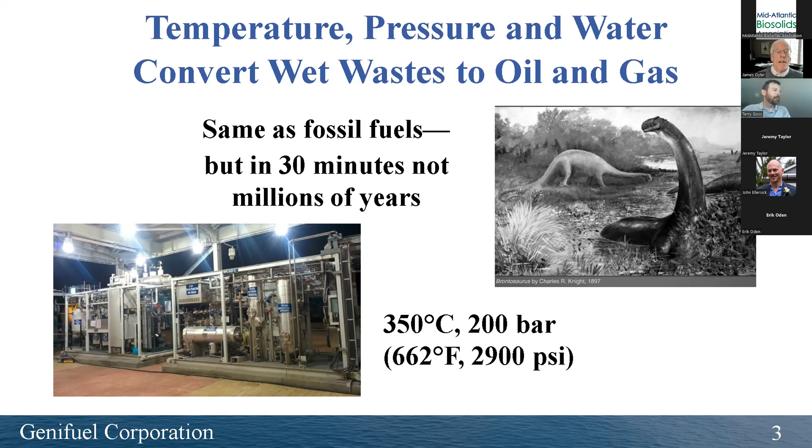This will work with anything organic, really waste from almost any kind of stream, including wood and ag waste and chemical waste. It's been tested with over 100 different feedstocks, but right now we're focusing on wastewater solids because there's a real need in the wastewater industry for better methods of handling wastewater solids and resource recovery from that. So that's what we will talk about mostly, but I will from time to time talk about some of these other processes as well for food and animal waste.

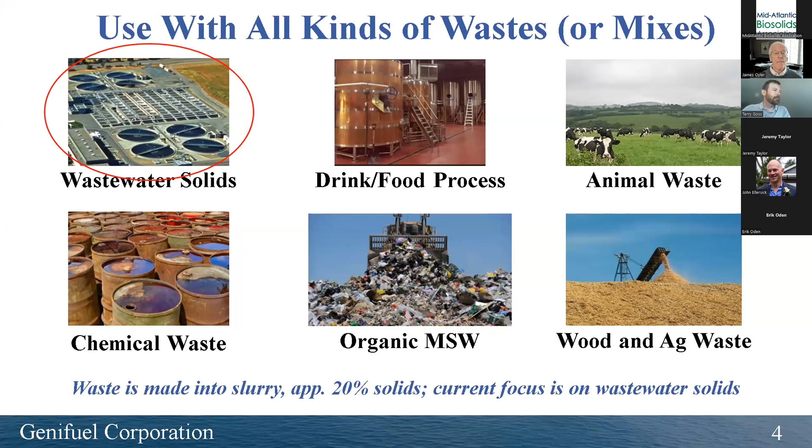We get the oil, which is just like crude oil or petroleum, and it's processed the same way. So that oil, although you could burn it as it is, that's not what we would do. It would go to a refinery just like petroleum, and it would be refined into finished fuels.

Most biomass produces mainly diesel. Typically, most biomaterials will yield about 60% diesel. But the next most common product after refining is kerosene or jet fuel, which is a hot topic in this era of synthetic aviation fuels that everybody's looking for.

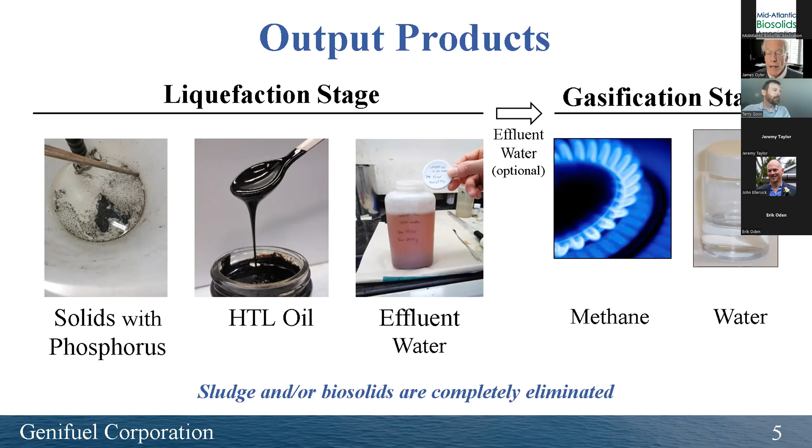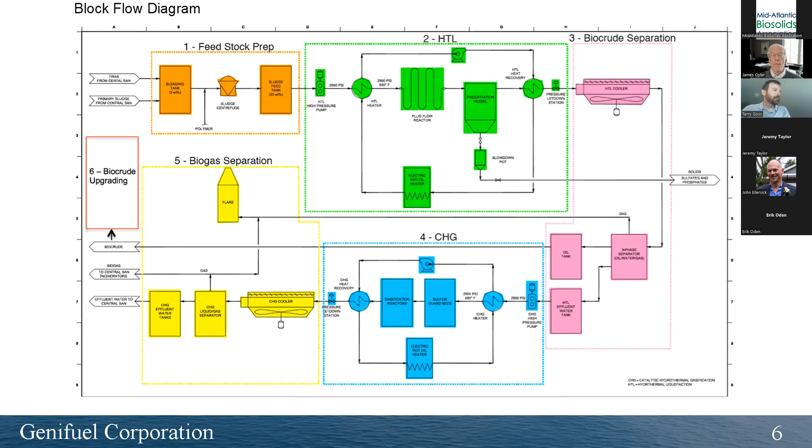I'm not going to go through this in detail, but there are a series of stages. The first stage, in orange, is preparing the feedstock, which we process as a slurry of about 20% solids — though we can actually process anything from 10 to 30 or even 40% if you can pump it, so it becomes a sludge handling issue. We make the sludge as high in solids as possible, because that gives the best yields. Then comes the hydrothermal liquefaction stage, the oil stage, the liquid stage. We separate the crude, pull it out, and the remaining brown tea goes to gasification, shown in blue. Finally, there's separation of the gas from the remaining water, so the water can be discharged, and the gas is most commonly used for insertion into a pipeline, right along with fossil methane.

Just some background on how this came about: we first started working with wastewater sludge through a discussion with WERF in 2013 — WERF being the Water Environment Research Foundation. That led to an elaborate, extended study called the LIFT study. There's a report on that, over 200 pages, which you can download free of charge from the successor to WERF. That led in turn to a recommendation — the primary recommendation of the LIFT study was that this process works very well with wastewater sludge and should be implemented at a utility, integrated right into the utility.

Metro Vancouver in Canada volunteered to be the utility for the integrated installation. That started with detailed engineering, which is now in progress, with commissioning planned for next year in Vancouver. It won't be the full size of the plant — the plant where it's being integrated is called Annacis Island, about 72 MGD, and we'll just do a portion of that flow, about 3 MGD. But it will be fully integrated into the utility, with all the pipes, pumps, and controls to operate it right along with the rest of the utility.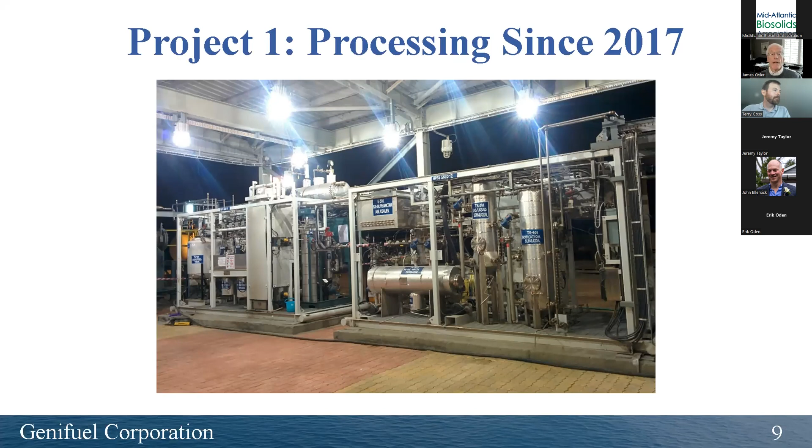We will further expand on that with the Metro Vancouver system, which will be multiples bigger than this one. I'll show you that in a minute. We've also built this containerized system.

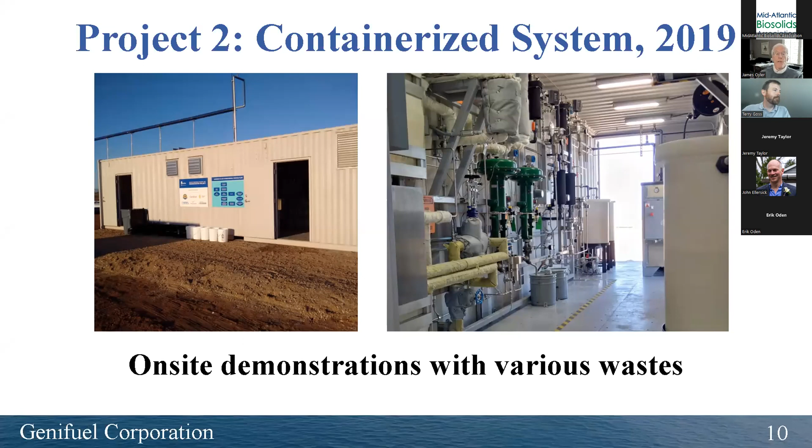It was first built to process dairy cow manure in California for the dairy industry. It was operational in 2019, but we've since upgraded it and used it on a much more focused basis for wastewater sludge. This is the 2023 startup for Metro Vancouver, and this is the Annacis Island plant there on the left.

This happens to be a really great site because there's a refinery only 2 miles away from the Vancouver site. It's a little too far for a pipeline, but it's easy to transfer the oil by truck to this refinery. It's a small refinery, about 57,000 barrels a day, and its goal is to convert to completely green renewable feedstocks, starting with hydrothermal liquefaction oil from Metro Vancouver.

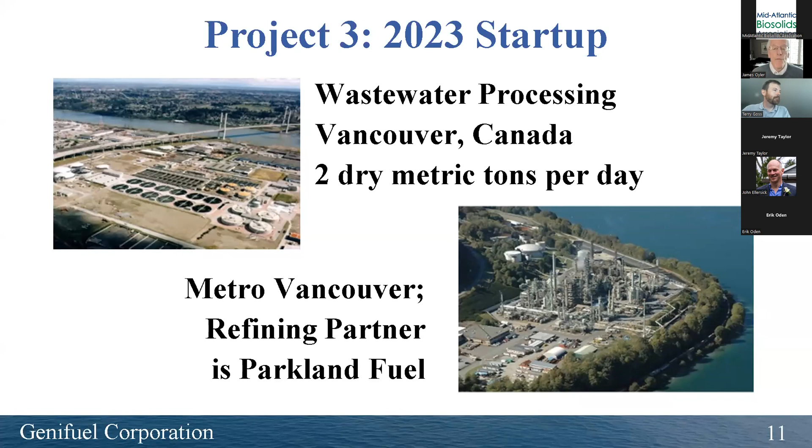This is what the Vancouver system will look like. You can't really see the dimensions on this, but it's all skid construction in a factory, then it'll be transported by truck and installed on the pad at Vancouver. The length of this picture, this ISO here, is 80 feet. The width is 18 feet and the height is 24 feet. So that gives you some feel for the dimensions.

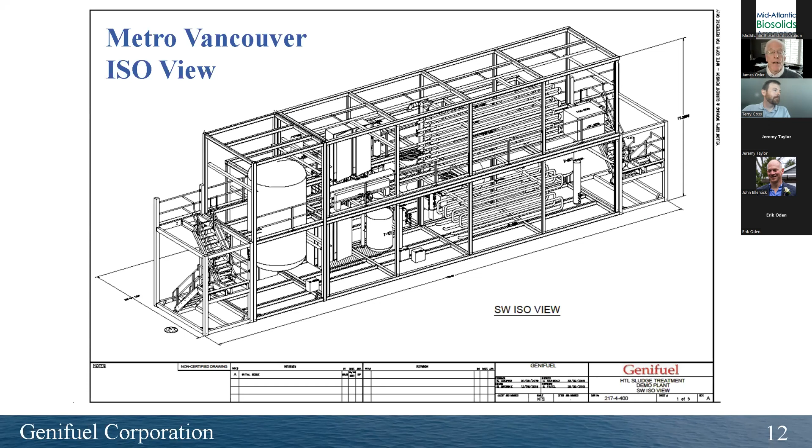These things, like the others you've heard about today, have a relatively small footprint. They're compact. They process very efficiently, and they don't take up a lot of space.

And we're actually going back here to Durham later this year because we didn't get as far with the biosolids as we wanted, and we're going to pick up again at that point. But we did move out in the middle of the winter because it got pretty cold, and this is a water system. If it's not operating 24/7, you're in danger of freezing. So we went to Florida.

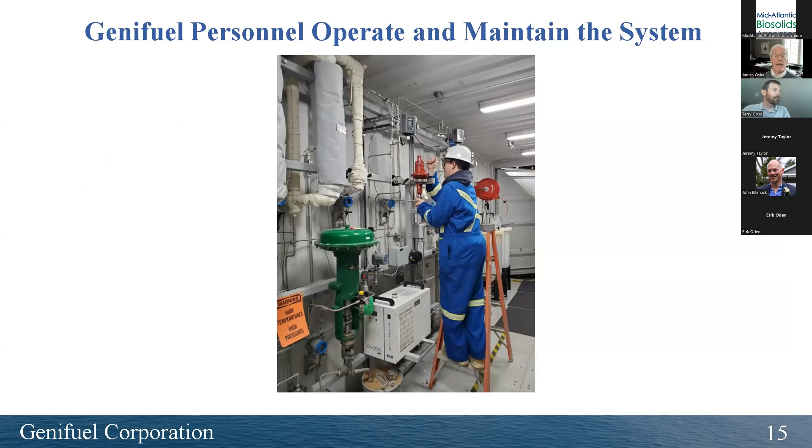We operate this and maintain it ourselves, but it can be done at a utility or by a third party, and there's various options for that. So now we're at Altamonte Springs in Florida. This is a regional water reclamation facility.

It's small overall, about 12 MGD, but it's a sophisticated plant that uses a Bardenpho process followed by aerobic digestion, no anaerobic digestion, and then dewatering of the sludge.

This is what the system looks like inside on the left. And on the right, we show two feedstocks that we've processed here in Altamonte Springs. One is algae, and that's a filter press on the upper right, and then a belt press on the lower right for dewatering the sludge from the plant.

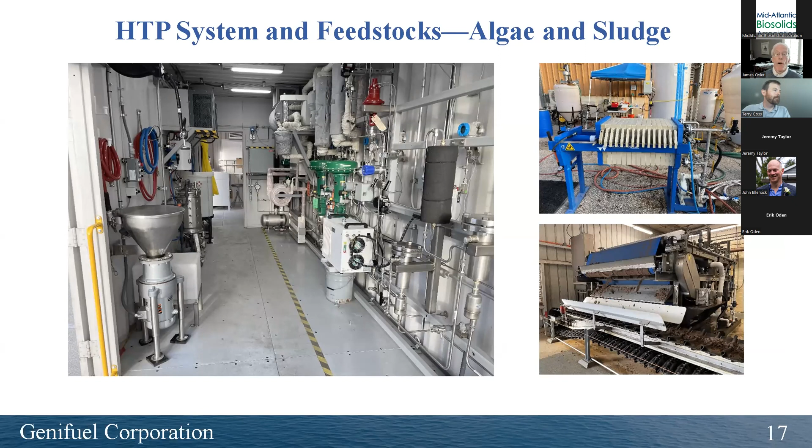The algae got dewatered up to about 16%, and the sludge at this belt press installation is about 12%. But we also got sludge from the Iron Bridge plant in Orlando, which is at about 18%. So we've been working with all of those and with mixes of the algae and the sludge.

So now sludge processing, I'm going to walk you through this on the scale of this containerized system. A big system or a bigger system like the Vancouver system, or a full scale system processing the whole production of the Altamonte Springs facility, would all be the same. We have the same processes in our container, just smaller.

So I'll walk you through what we're doing with the container. It wouldn't be the same in a full scale plant, it would be different equipment, but at least you see the process steps that we discussed earlier.

So it starts with the dewatering of the sludge. This is coming off of the aerobic digester, polymer addition, and then belt press to dewater. We collect it right off the belt press here and bring it to our system.

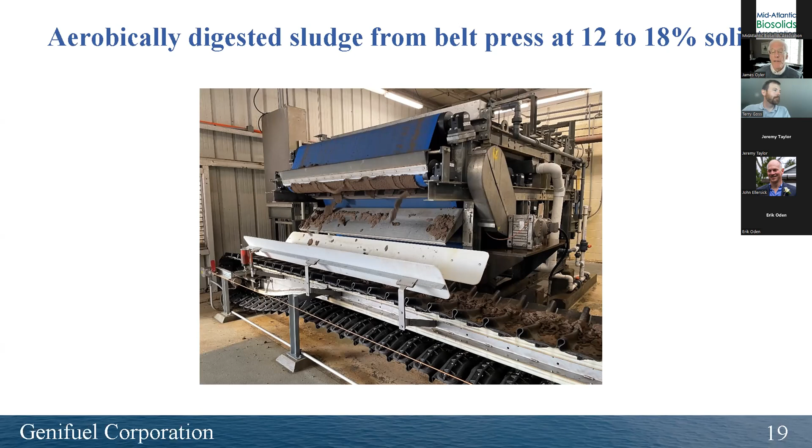So we bring it to our system, and our holding tank, if you will, is actually 55-gallon drums. We bring it over from the conveyor belt and the 30-gallon drums just because they're easier to handle, and we put it into 55-gallon drums. The sludge in the 55-gallon drums is stirred.

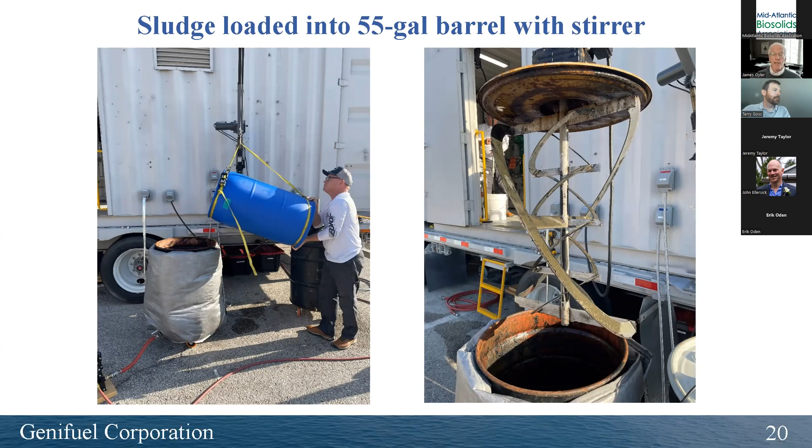So there's the stirring mechanism, and that stirring mechanism is lowered into the barrel after the sludge is added. We found that to reliably feed higher solids sludge, we need to keep it mobilized, we need to keep it stirred. We also found that we need to heat it to reduce the viscosity a bit, so we have a steam sparger in the bottom of the tank.

This tank is just showing that the steam is being injected, but you don't see that when it's actually running. On the right, the stirring mechanism is being lowered into the drum. The steam will be started. We also have a cladding over the tank, which has hot water circulated in it to keep it warm, and a blanket.

The next thing we do is we grind it with a grinder stage. This happens to be just a commercial strength garbage disposal unit, but we grind the sludge to make it smooth and easily pumpable. Then we pump it into our holding tank on the right here, which is also heated, and it's stirred as well. You see a pneumatic stirrer on the top.

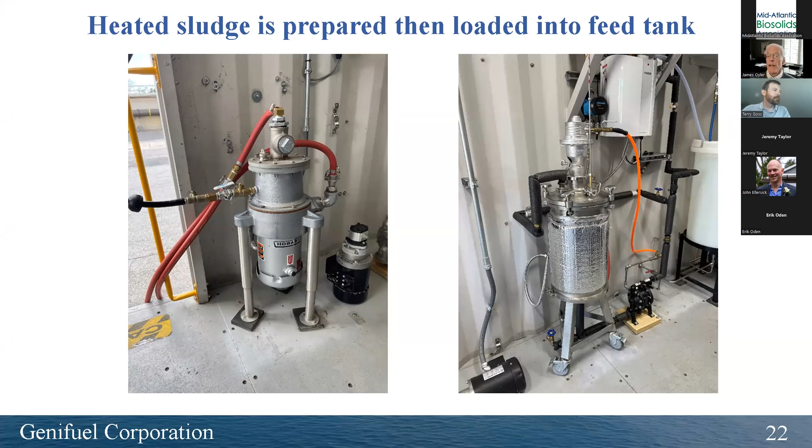So we keep it moving, keep it stirred, and then we take it to the high pressure pump on the left. This is a small scale high pressure pump. It's capable of 5,000 PSI. We're only working at 3,000, which is 200 bar. But in a commercial operation like Vancouver, these would be much larger high pressure pumps, industrial scale types.

From there, it's pumped into a series of heat exchangers and vessels flowing down through the system here, basically just to provide residence time. That 30 minutes of residence time is what's needed to convert it. On the lower left there, that insulated device is actually a heat recovery heat exchanger. It's a tube and tube heat exchanger, very efficient. So we recover the heat from the outbound products and bring it back to heat the feedstock.

So this is the output, what the oil looks like coming out. It doesn't look much like oil here because it still has a lot of water in it, but that will then be separated. We're currently doing it by gravity, but in the commercial, full scale implementation at Metro Vancouver, it'll be done by centrifuge to speed it up and get a higher efficiency of separation. We do have a centrifuge which we use here, but it's a batch centrifuge as opposed to continuous. Everything else in this process is continuous.

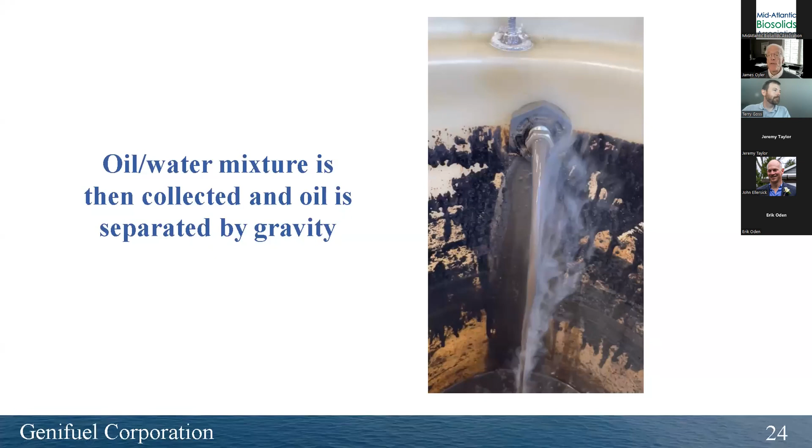So in conclusion, this process, we demonstrate here with the smaller system that this does work. We can make oil as well as methane gas. I didn't show the gas stage because there's not really much to see. It's flowing across the catalyst, and then the gas is available for insertion into a pipeline.

This is an easily scalable system. We've scaled it already, I showed you that system in India. We're scaling with the system at Metro Vancouver. And in fact, the larger systems are actually a lot easier than this little system. The reason is this little system has really small pipes, and so everything has to be perfectly made into a perfect slurry and handled just right so you don't get plugging. But in the bigger systems where you get up to 3 or 4 or 6 inch pipes, that's not really an issue. So it's actually much easier to build the larger systems.

System design is emphasizing long-term reliability and operability. These systems are designed to be automated and run from the control center, the SCADA center of the utility. We would have some staffing on a prime shift, but not every shift. And it's intended to be reliable with a quarterly maintenance cycle and a once a year longer cycle of 2 weeks for making any equipment changes that are needed.

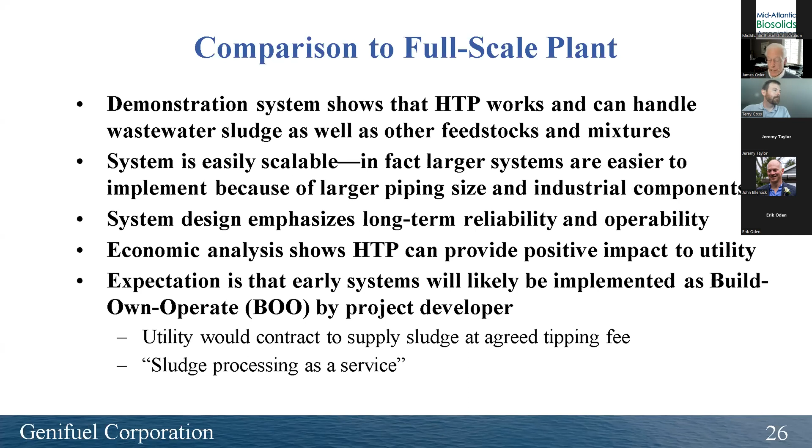Economic analysis shows that this is a positive impact on the utility. In other words, it's profitable. And it can be done either as a utility-owned system or as a build, own, operate, where a project developer would build and operate this system. That is actually pretty interesting to a lot of utilities because they aren't familiar with this yet, and they would maybe want somebody to do it essentially as a service in the early years. So that's a possibility. There's contact information if you want to contact me later.